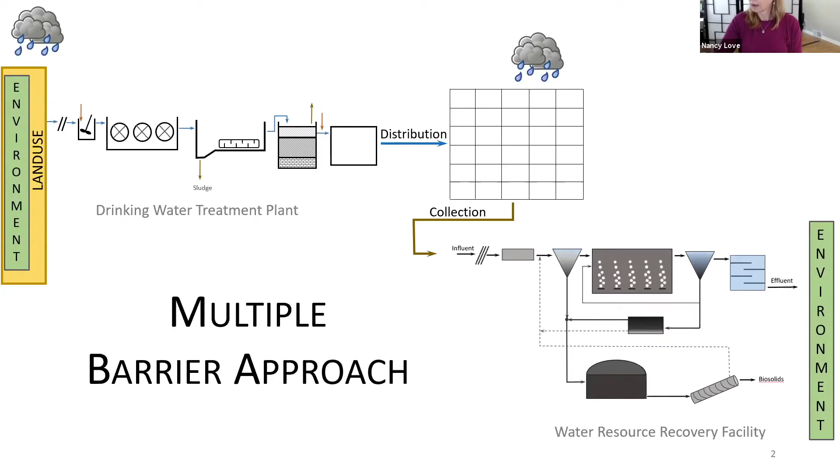So it's a typical distribution system. I'm just showing you a picture. And what this is reflective of are the pipes that take the water from the treatment plant. In this particular case, the treatment plant is sitting kind of in the middle of the community. And then it pushes the water out in all these different directions in pipes. And those pipes are underneath our streets. And so if this looks like a street grid, it should, because that's where the pipes are.

You have oftentimes a pump station that will add pressure, and we need pressure in our water lines to keep the environment from leaking in. We don't want that to happen. So as long as there's pressure in the pipe, any leakage would be out of the pipe and not in from the environment. If we have a line break, then we have an opportunity for water or other things to come into our pipes, and we have to decontaminate before that water can come back online.

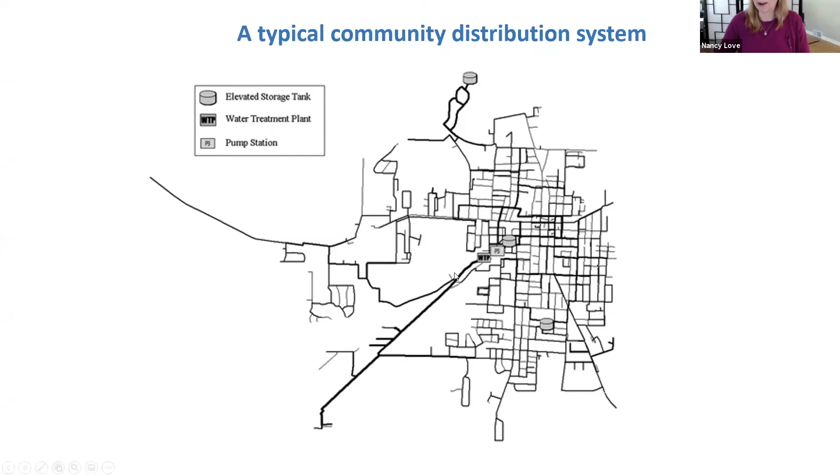We can also have storage tanks, and we often see these in our communities that provide that kind of pressure and elevation for our communities. So this would be the typical, what it looks like if you were to map it out, and it links in with the map of the community. But if you kind of go underground and think about the different parts, you have your source. This shows a surface water source. It could be a groundwater source.

You have your treatment plant, which then pushes it out in large transmission mains. And those transmission mains sometimes have booster pumps that enhance the pressure, but then they will tap off of the transmission main into a distribution main. And then a water main that is in the street from which our buildings tap into. And the utility is responsible for everything in blue, and then the building owner is responsible for everything in yellow.

So what we refer to as the piping that comes into the building is a service line that comes from the street into our building. And then inside the building is the plumbing in our building, and that's called premise plumbing. And we know a lot about treatment systems. We know a lot about water quality and pipes, although there's still things we don't know. We know a lot less about water quality and premise plumbing and the actions we take or the material effects on that plumbing. There are some things we definitely do know.

We do know, and I think Elin will get into this, we do know that lead is bad and that lead is present kind of in a lot of our systems, even in lead-free plumbing, and that we have to take action around that, especially when it comes to schools. And I think Elin will address that.

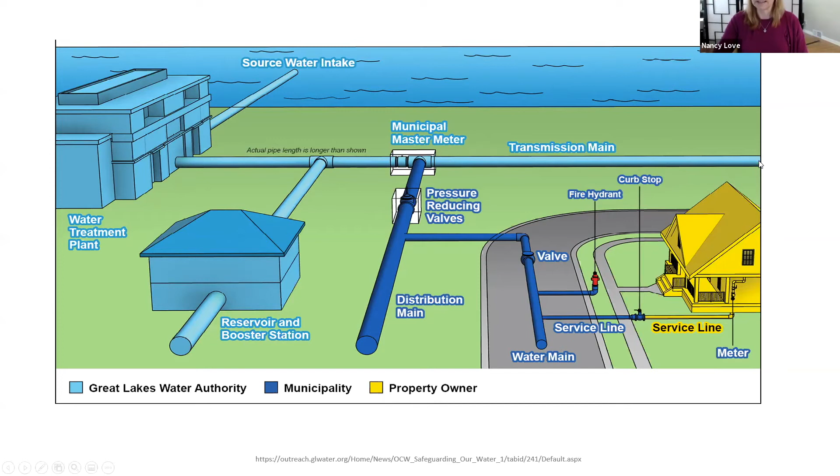The water distribution system was designed assuming growth. And so it was designed even before all these houses were there, but to provide water at the pressure needed to maintain the quality and maintain disinfectant in that water, so that when it comes out of your tap, you have the water quality that the drinking water treatment plant intended for you to have coming to your house.

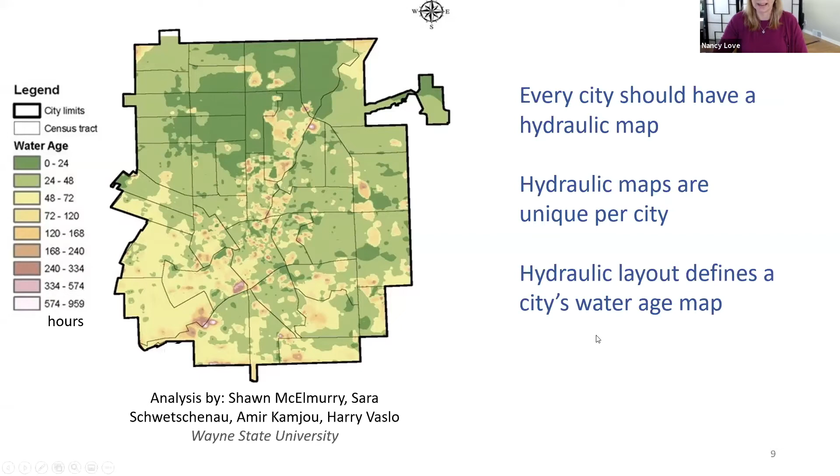Disinfection byproducts: the disinfectants we add to remove the microbes or the germs that might be in our water are very effective at killing them, but can also react with other materials in our water to form some chemicals that, if at too high a concentration, can be harmful.

This is where it becomes really important with this premise plumbing, because we can control the distribution system, but we can't control what goes on in a building unless people are actively using the water in their building and flushing it, which is what becomes really important when we talk about schools, especially schools that have been shut down for some period of time.

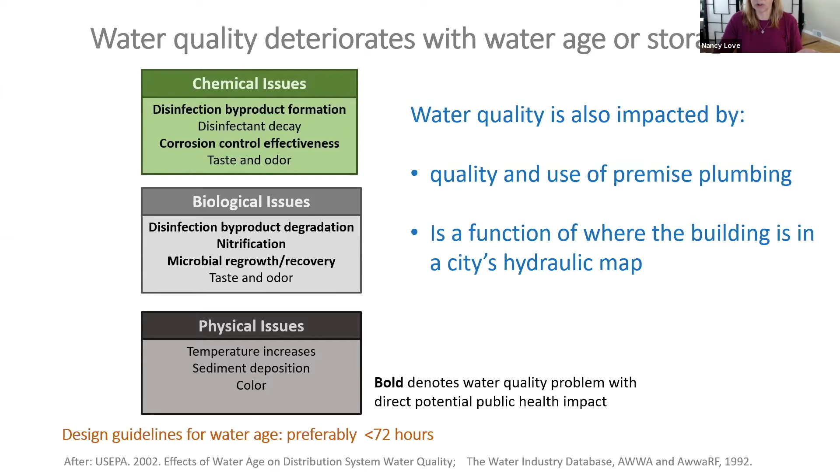This is not a normal kind of status, I think, for many schools, except for summer break. So there is some experience there, but I think it's really highlighting with this COVID situation the need to really pay attention to what we are doing to get buildings back online. So water quality is impacted by that premise plumbing, and it's a function of where the building is in the city's hydraulic map.

So I'll finally talk about a few things that sometimes are done. Inside the building, if we have concerns about the water quality, be it because of what's going on in the distribution system and we have high water age, or if we are concerned about lead that might be leaching from materials used in the distribution system, the service line, or the premise plumbing, then we might use point of use solutions.

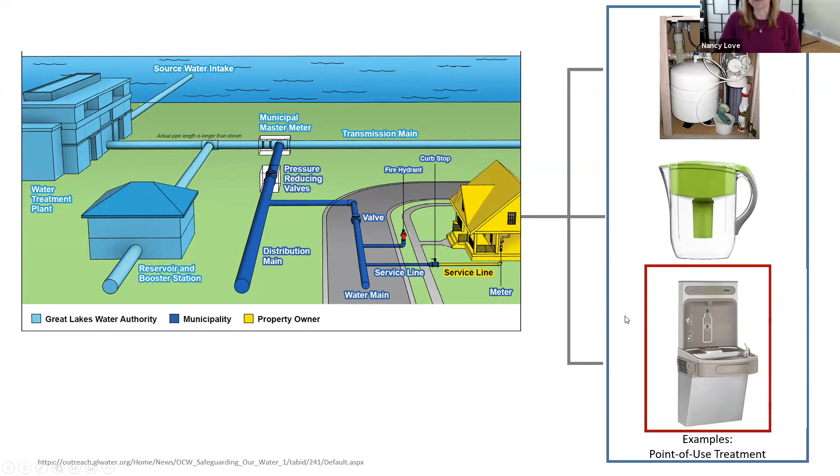It's the same thing that they use in the hydration stations that you might find in your school or an airport or a public space. It's the same material they'll use in the point of use filter you might screw onto your faucet in your kitchen. And sometimes they have a fabric wrap around them to hold the carbon fines together as they manufacture the unit.

Sometimes they don't. And then the water comes in, goes to the outside, and goes radially through the cylinder into the middle, which has this annular hole, and then the water comes out, and that's your cleaned water that's gone through the activated charcoal.

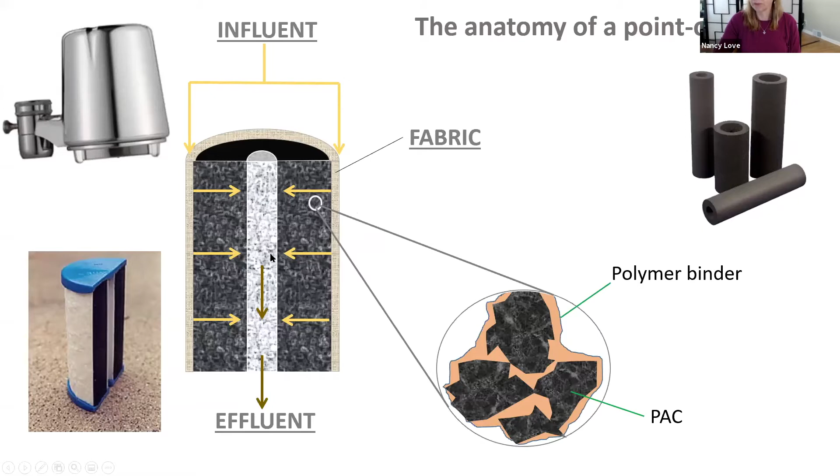These systems are certified by the National Sanitation Foundation and ANSI. There are some very clear, stringent requirements. You should always look to see that the units being used have been certified through these agencies. The two main certifications I'm showing here relate to the health of the water and the aesthetics of the water.

And I bring this up because there's been a lot of work done showing how to implement the activated carbon block systems to remove heavy metals like lead. And that works very well. Our experience in both laboratory research and in communities where we've measured use of these activated carbon block filters in systems that have lead in the water is that they do an excellent job of removing lead below detection as long as the system is maintained.

And that's the key. The thing that I want to point out is that, other than larger microbial organisms, the bacteria and viruses are not part of these standards.

And so they're not, because it's known that the activated carbon block is actually not going to remove them. And in some cases, depending upon, again, where you are in your distribution system and the quality of water that comes into your building and the way you maintain the water in your building, you can get quite a bit of microbial growth in these filters.

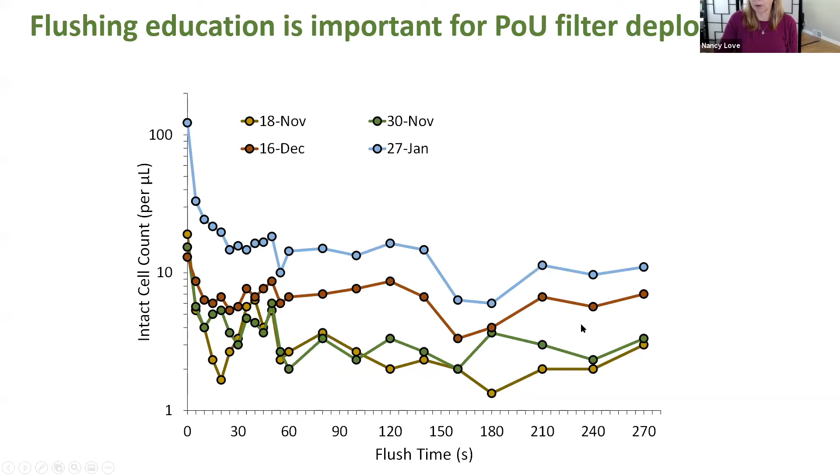But what I want you to focus on is the first 30 seconds. If you flush that filter, you decrease your cell counts by at least 10-fold and maybe more. So the flushing is a really important part of using any kind of filtered system.

So on the point of use filter side, you have to think about where the building that the filter is in is within the overall system. Water age is really important, and your utility should have a sense of which schools are in high and low water ages if you want to know. But either way, the whole concept is that if you have high water age, you have the potential for reduced disinfectant residual, and so you want to make sure you pull in water from the distribution system to maintain water in the building that has disinfectant residual, and that will reduce these bacterial buildups.

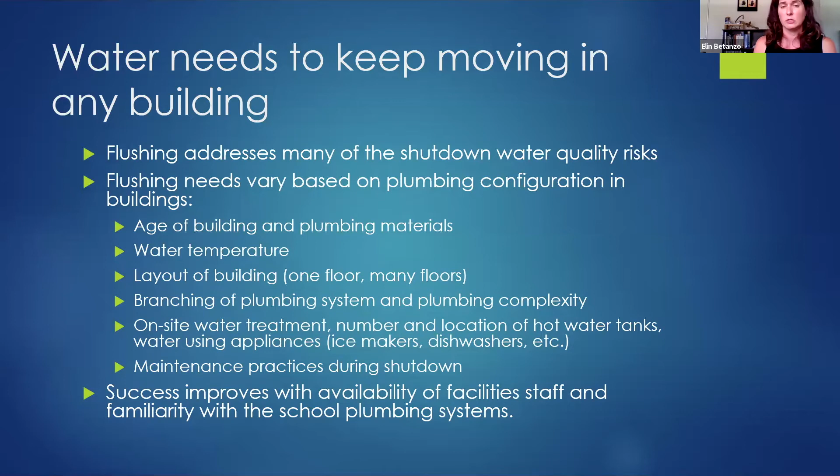And so then another thing to consider in looking at flushing and reopening school buildings is what the maintenance practices have been during the shutdown. The success at a school is going to improve with the availability of facility staff and a good familiarity with that plumbing. The less resources the school has available to deal with that, the more complicated it is. But the more maintenance there was in flushing water use during the shutdown, the better position the school will be for reopening.

So a key point to consider is the longer the water was shut down, the longer it takes to restore water quality. So if nobody's been in the school during this time and the water hasn't been moving, then additional care has to be taken with reopening. It is also important to consider who is using the water in the school and where they are using it.

So schools in my area have been open for some limited uses that are very different from normal water use, especially over a summer period. So there are some buildings that have limited spaces that are open for food preparation for the summer meals programs. There's childcare areas that are open. So a very small portion of a much larger building is active.

Summer athletic practices have been going on and they require some access to bathrooms and hydration for those students. So there may have been some limited water use going on that might be starting up right now as schools are phasing in.

So it's important to consider who is using the building, where they're using the water, and if there has been or should be a building-wide flushing program right now to be maintaining the water quality for those limited users. Again, the quality of the water right now depends on the maintenance practices during the shutdown and during these limited uses.

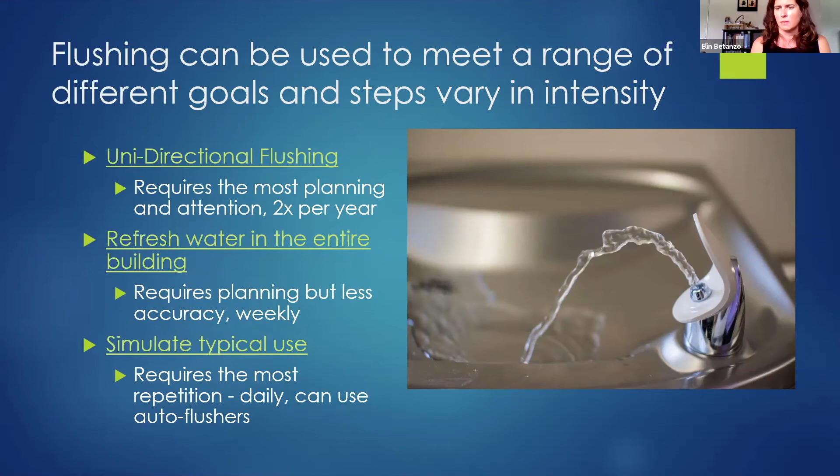So in my area, I have seen 3 major strategies for reopening schools. And so your water quality needs and your ongoing maintenance are going to depend upon the type of reopening plan you have in your school district. So at one extreme is the return to school, where everybody is coming in using the building as normal. Then there is the hybrid program, where a school district might offer an online option and an in-person option. Maybe they have half days to limit the number of students in the school. And that's really going to change typical water use patterns in the school.

So if students are only there for a half day, even if it's 2 half days worth of students, they might not even have to go to the bathroom during that time. So we have to consider how the use of the building is going to affect typical water use in the building. And then there is the all virtual instruction model, where everybody is doing all online learning. That doesn't mean you can ignore the water quality in the building. You want to keep it moving, because one day you will reopen that school, and the more you're doing maintenance there, the better the quality water will be ready to accept students in the building. So those are the 3 bins that you could put return to school plans into.

So for each one of these, you would want to consider whether unidirectional flushing is appropriate as a starter to clean out the plumbing and start fresh as you're going forward, maintaining the water quality there. If you're going to have a full population of students and staff in the school, you absolutely want to keep the water moving. It's possible that the ongoing use with your normal activity is going to be enough. But again, if the water has been shut down all summer, you want to have that water turnover plan happening several weeks before students are in the building.

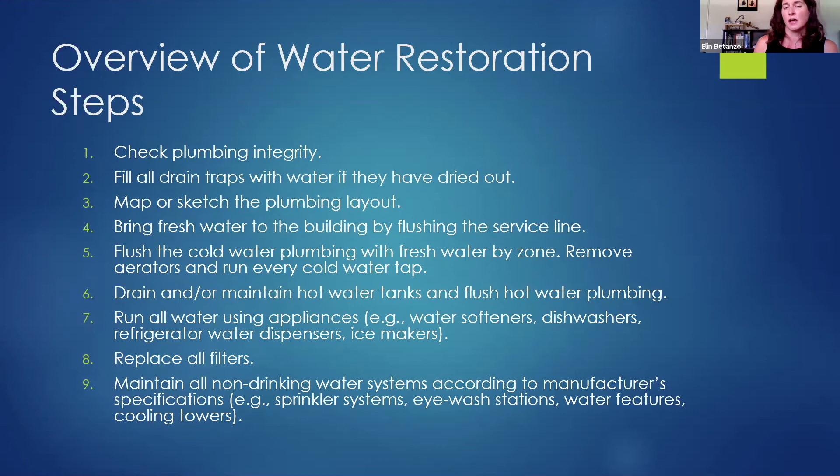You need to work through all of your water using appliances and make sure that volume of water is turned over. If there are any filters in the building, if they're the bottle fillers or those hydration stations that Nancy talked about, make sure all the cartridges are replaced, even if they were replaced near the end of the last school year. It's been a long time. They need to have fresh filters, and that can also be faucet mount filters or pitchers, depending on what might be in place in the school or childcare facility. And then there are all the non-drinking water systems to maintain. You do that according to the manufacturer's specifications.

So I keep talking about the need to bring fresh water in. You want to use the fresh water to push the old water out. And so as Nancy had gone through, we have the water service line. We've got a water main in the street and a service line, and many school facilities can be very far set back from the water main. And those service lines can have a large diameter because they have to bring enough capacity to that school. So there can be a very large volume of water in that service line. You want to get it out of the way before you start pulling water into the school. So locate the taps that are closest to the service connection to the school and flush those first.

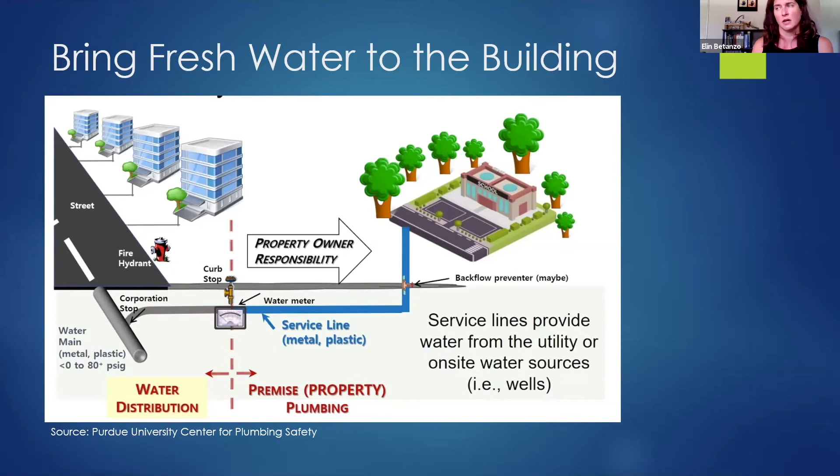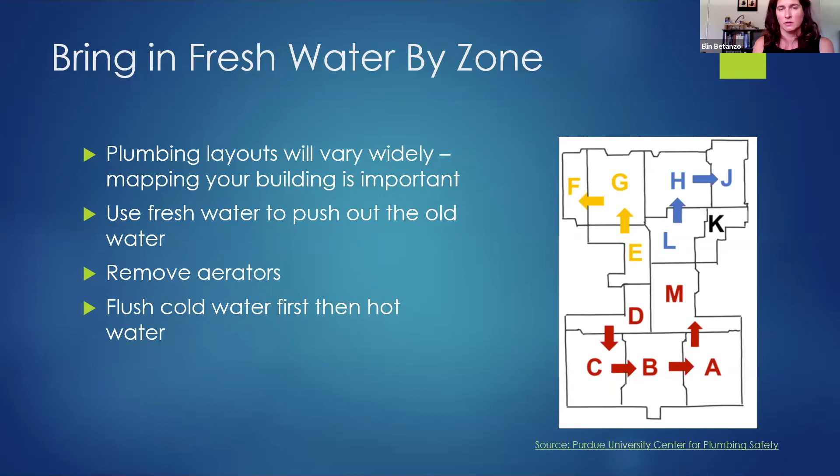Calculate the volume in that service line and turn that over entirely before you do anything inside the school. And then once you are working in the school, you can map it out, see how there are different zones in the school. Here's one example of one map of how water travels. And then you flush by zone. So once you've brought the fresh water in from the service line, you're bringing fresh water to each zone. You're not pushing old water from zone to zone around the school. It's more effective, the fresher water that comes from the main.

So then Legionella and hot water tanks. If we don't have a high Legionella risk, the hot water tanks can kill any Legionella that may have grown inside a school building. Again, the greatest risk of Legionella is from inhalation of water droplets. So cooling towers, showers, these types of water sources are where you are likely to find Legionella risk. A water tank has to be at 140 degrees Fahrenheit to kill any Legionella that may have grown.

If you've got facility staff, use them to drain and fill the hot water tanks to make sure they're in good operating condition. Make sure you've got a professional there. Sometimes there's sediment issues. The water temperature can change from the tank to the tap as it travels through the pipes. You want to make sure that the water temperature is at least 120 degrees at the tap to kill Legionella that might have grown in the plumbing between the hot water tank and the tap.

But then, we're dealing with small children and we're concerned about scalding risk. So check the local requirements, what you've had in the past for addressing scalding risk, if a temperature adjustment after you've flushed the hot water is appropriate. There might be requirements and recommendations from the local health department about how to deal with that.

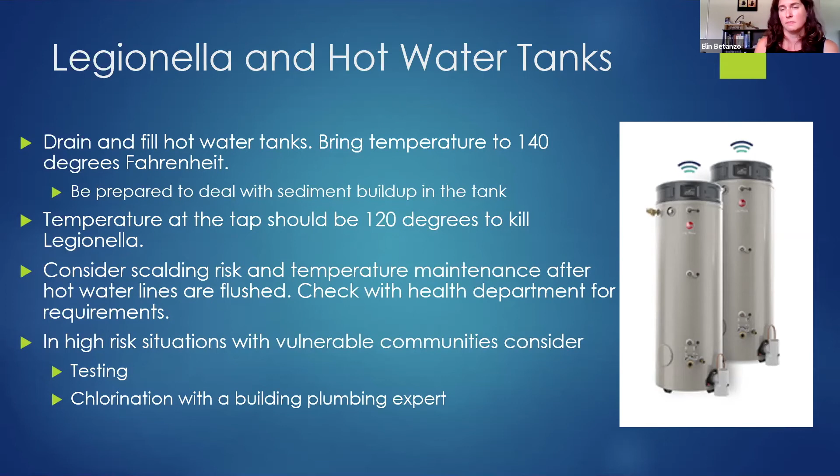If you have a high risk situation where you know about Legionella, definitely bring a professional in to consult with this. You can do testing in the building, and shock chlorination can be an option, but only do this with the assistance of an expert.

Lead in drinking water is definitely an issue and a concern as we reopen schools. We need a regular turnover of the water for any corrosion control to work. And most of our plumbing in schools contains lead. There's a lower risk of high lead in plumbing in schools built after 2014, but in general, we can just assume that there is lead in the plumbing in our schools, especially those built prior to 2014.

In schools, we already had irregular water use patterns even before this shutdown, with our weekends off, week-long breaks, summer breaks. So corrosion control was already a difficult factor to maintain inside schools. And if water has been off, some estimates show that it's at least 12 weeks or more of regular water use to regain corrosion control in the plumbing. So in this case, the safe approach is to assume there's lead in the water, provide filtration, or advise students to bring water from home, or provide bottled water.

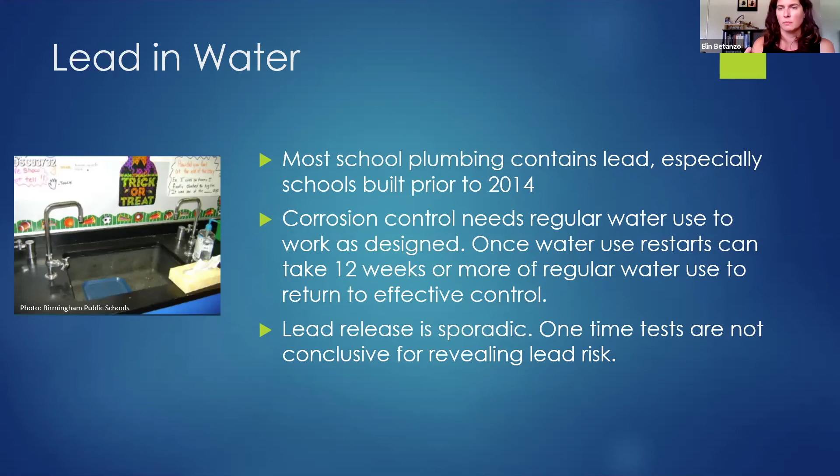If you do testing, lead release is sporadic. One-time tests are not conclusive for revealing lead risk. It's very possible to have a non-detect lead test one time, and then the next test you come back and have a high lead level in the water. So relying on testing alone to identify lead risk can result in exposure of our most vulnerable populations. So in this case, keep the water moving and use the certified filters, as Nancy had pointed out, the different certifications that you need to look for.

As we're dealing with coronavirus, hands-free water is highly desirable. So many schools already have installed bottle fillers like the one shown here on this slide. It does provide an option to fill your bottle, and if there's a filter, even better, but you absolutely need to have that filter there and make sure that parents and students know whether those are filtered or not. So as Nancy said, replace and maintain all the filter cartridges to ensure that they are operating as designed.

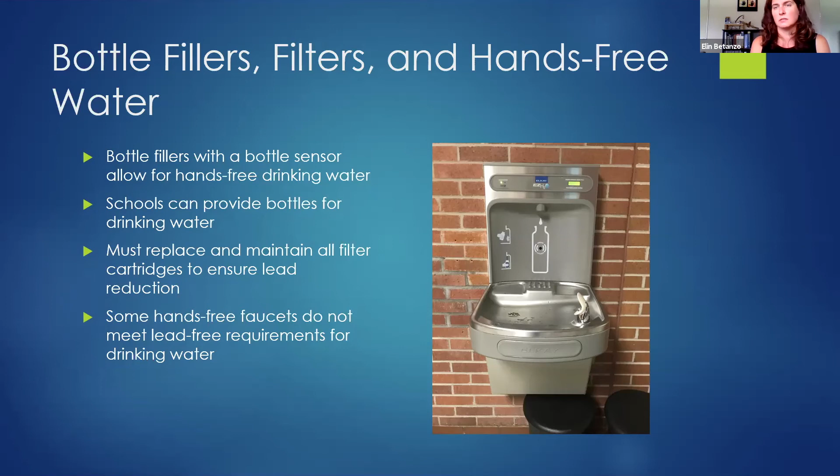And another point to consider as you are returning to school buildings is that many of those hands-free faucets with motion detection for hand washing are not required to meet lead-free requirements because they were never intended for drinking water. So it's very important to have clear signage that those hands-free hand washing sinks should not be used for drinking water because they might have a high lead content.

You might consider some of the flushing steps and the mapping and the planning a lot of work, and it is, but this is an opportunity. This isn't just a one-time thing as a response to coronavirus. If you get a water quality management plan up for the school building and operating, you can use that, and you should use that forever and ever moving forward because these water quality issues are an ongoing thing. So any work that you do to develop these plans, communication protocols, how to talk to parents about the water, signage and filter strategies, these will all benefit you in the long term.

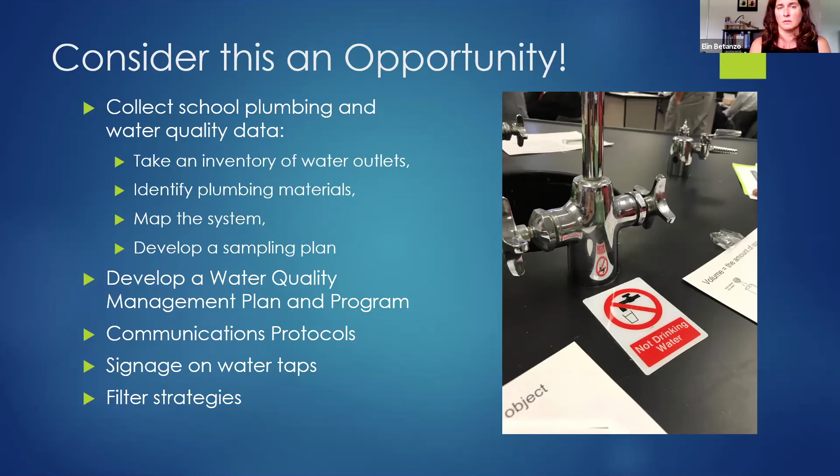So parents might have some questions or want to ask about what has been happening in the school during the shutdown. So here are some questions that you might want to ask. Do you have a water quality management plan? Who is implementing that? Can you share a copy? How has the school been used during the shutdown, and what water quality maintenance has been going on during that time? And what flushing procedures have they been using?

Questions about water testing. I think Nancy said we have no federal requirements for water quality testing in most of our schools. And so some schools do water sampling. They should share those results with the parents if they're doing the sampling. So definitely ask if that exists and make sure you get a copy of it. So have they done any water quality sampling? What protocols were used? What contaminants analyzed? You get all that information. Don't let them just trickle out, our water is safe. You get the underlying data and find out where those results are posted.

Ask about how kids are using water at school and what the school is going to tell kids about that. Are they offering touch-free water? If they haven't been able to maintain water over the summer, what are they doing to tell students to bring their own water? Are they providing their own bottled water? Are they relying on students to flush their own water prior to drinking? That's a good question because we shouldn't put that responsibility on our children. And are they labeling untested or unflushed faucets for hand washing?

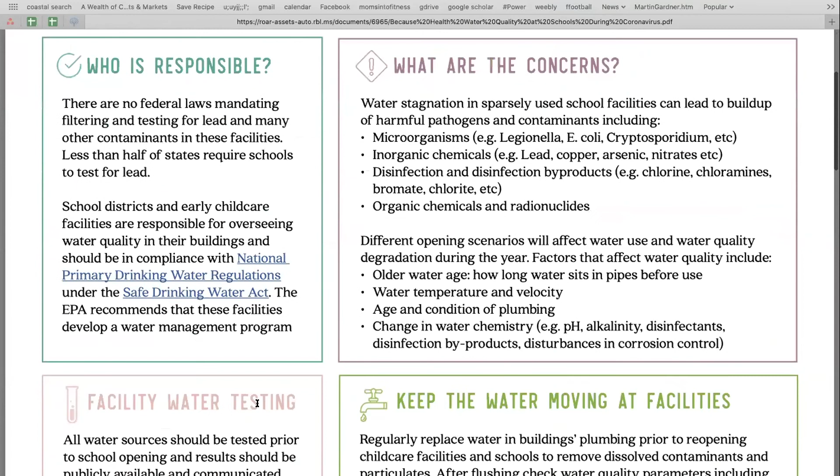I wanted to quickly share that some of the questions that Elin had in her slides, we wrote up on becausehealth.org. It's a 2-page toolkit, I'm going to click on it so people can see, that talks about some of these issues in a way that's easy to download and send to a school administrator or childcare provider. And we have some links to things about flushing and testing, and then on the second page we have suggestions for what parents can do to protect their children, and then also very importantly a list of questions that parents can ask. So this is available both as a resource on the webinar page and on our website becausehealth.org.

So I will now get to questions. Let's see. We had one question. Are schools generally regarded as high water use facilities?

I guess I'll try with that one. Compared to residential buildings, schools would be a higher water use facility, but compared to many commercial buildings, they wouldn't be quite as high. So I think in most communities, they would be kind of like a mid-range water user. Okay.

I think this question's for you, Nancy. How does the presence of water towers influence water age and quality? I mean, it can. It depends on how it's linked in with the hydraulics. The map that I did show you is a community where a water tower has a huge impact on water age, a negative impact on water age. And so it's a water tower that is old, wasn't being maintained correctly, et cetera. So again, these are something that your water utility would know and need to be addressing to make sure that the water towers are actively moving water in and out and not being part of the stagnation problem.